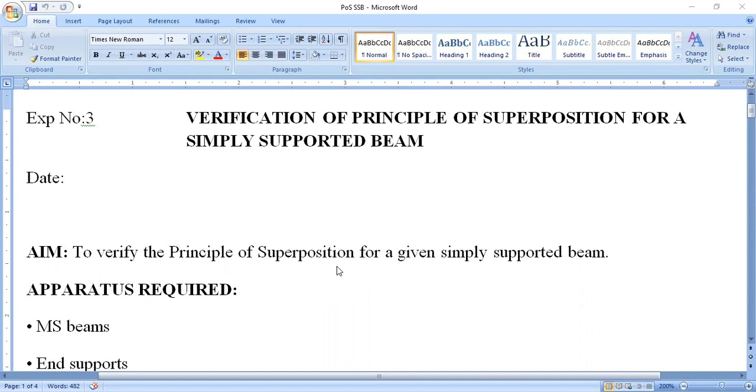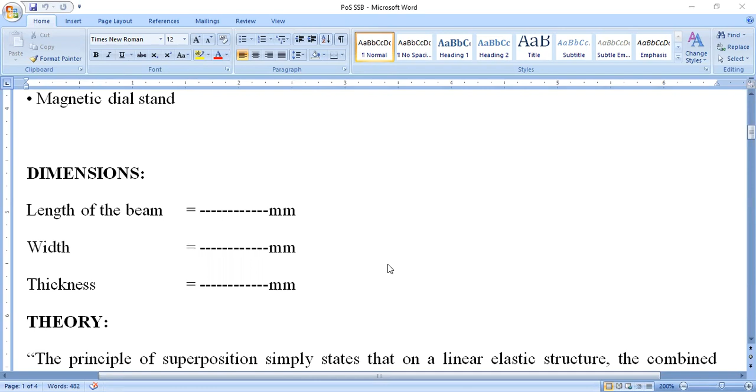The same apparatus is required. The dimensions I have given in the last class itself. And this is the theory, the principle of superposition theory.

The principle of superposition states that on a linear elastic structure, the combined effect of several loads acting simultaneously is equal to the algebraic sum of the effects of each load acting individually.

Delta 1 plus delta 2 is equal to delta 1 2, where delta 1 is the deflection at reference point O due to load on point 1. Delta 2 is the deflection at reference point O due to load on point 2. Delta 1 2 is the deflection at reference point O due to load on point 1 and 2, acting simultaneously.

Now I will explain with the help of a figure so that it will be easy for you to understand.

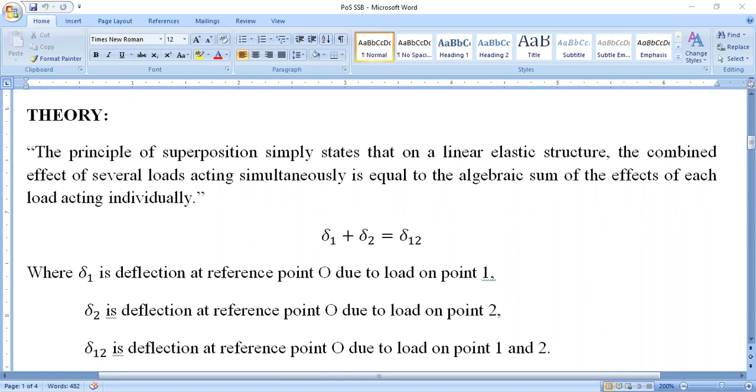Now this is the diagram. Simply supported beam, or the beam resting on a knife edge. Mark 2 points randomly, let us name them point 1 and point 2. Mark the reference point O anywhere along the beam.

Let us apply a load W1 at point 1 and W2 at point 2. Both W1 and W2 are acting simultaneously. Here weight hangers will be placed at both points. Add the weights simultaneously, and at the reference point, the dial gauge will be placed.

Once the weights are added simultaneously at point 1 and 2, measure the deflection at the reference point with the help of the dial gauge. Now this is the deflection delta 1 2.

Now, same beam, remove the load W2. Now apply the load W1 at point 1, measure the deflection at the reference point O. Let that deflection be delta 1.

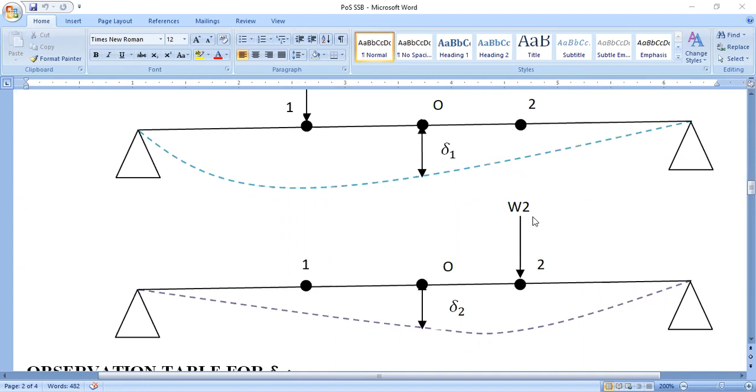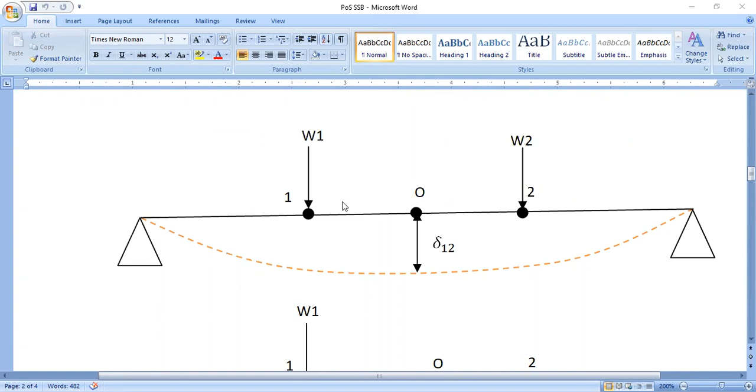This deflection delta 1 at reference point O due to load at point 1, plus deflection delta 2 at reference point O due to load at point 2, will be equal to the deflection delta 1 2 at reference point O due to loads acting at point 1 and 2 simultaneously.

As I explained in earlier classes on Maxwell's reciprocal theorem, how to take down the readings, how to fix the dial gauge, how to add weights in the weight hanger, and so on. For each increment of load, in the range of 500 grams or 0.5 kg, readings are noted down from the dial gauge and entered in the tabular column.

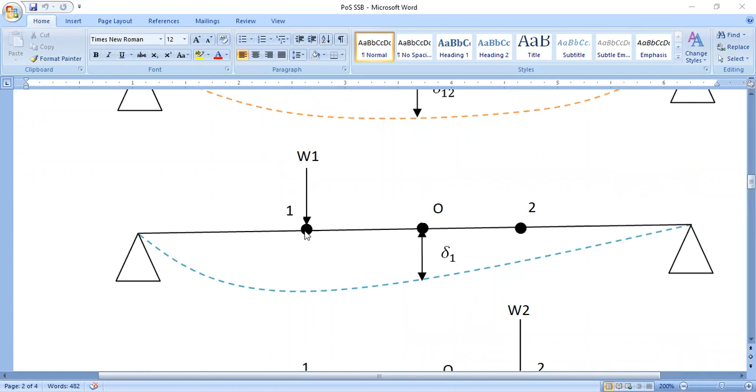This tabular column shows the readings for weight W1 added at point 1, like 0.5 kg. Measure the reading at the dial gauge at reference point O. Then add one more 0.5 kg, so for 1 kg, what is the dial gauge reading? For 1.5 kg, what is the reading? For 2 kg, what is the reading? For 2.5 kg, what is the reading?

Then unload it, remove 0.5 kg at a time, and note down the unloading reading also. Then calculate the average of the loading and unloading readings. Convert that dial gauge reading to millimeters by multiplying by 0.01.

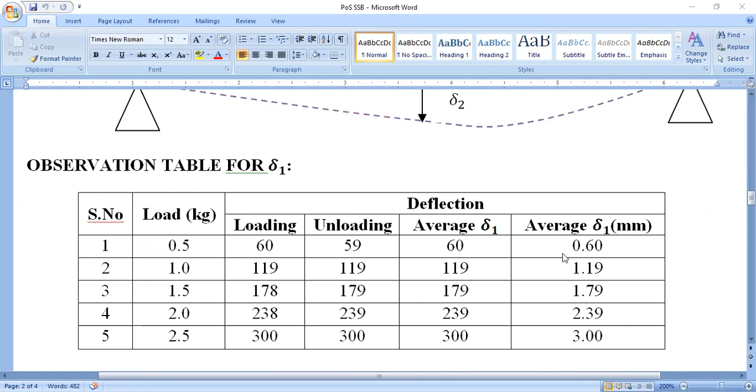So these are the deflection values at the reference point O due to weight at point 1.

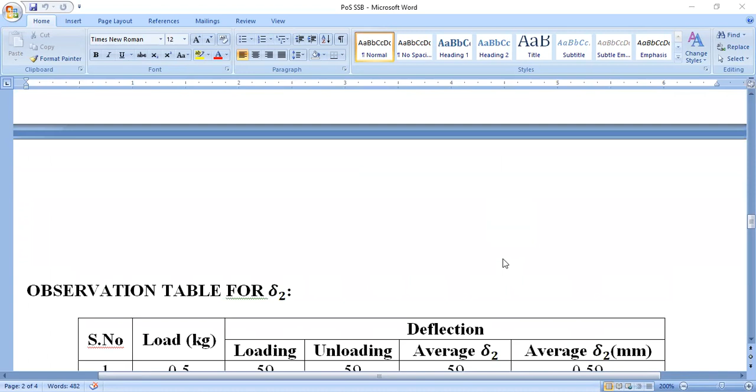Now add the weight at point 2 alone, in increments of 0.5 kg or 500 grams, and note down the deflection at the reference point O. Same way: loading, unloading, take the average of these two, enter here, then convert to millimeters by multiplying this average delta 2 by 0.01.

Then for P1 plus P2, add weights at point 1 and 2 simultaneously, like 0.5 kg at point 1 and 0.5 kg at point 2, that is W1 plus W2 or P1 plus P2. So 0.5 plus 0.5 is 1 kg, then again add 0.5, so 1 kg plus 1 kg is 2 kg, and so on. Measure the loading readings, then unloading readings, take the average, then convert to millimeters.

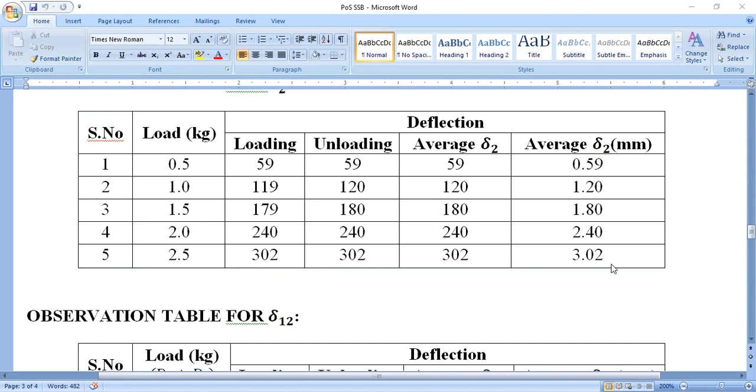Now look at this, take any readings and compare your results. What the principle of superposition says: delta 1 plus delta 2 is equal to delta 1 2. Delta 1 is 0.6, delta 2 is 0.59. If you add these, you will get 1.19 millimeters. So this is the procedure for a simply supported beam.

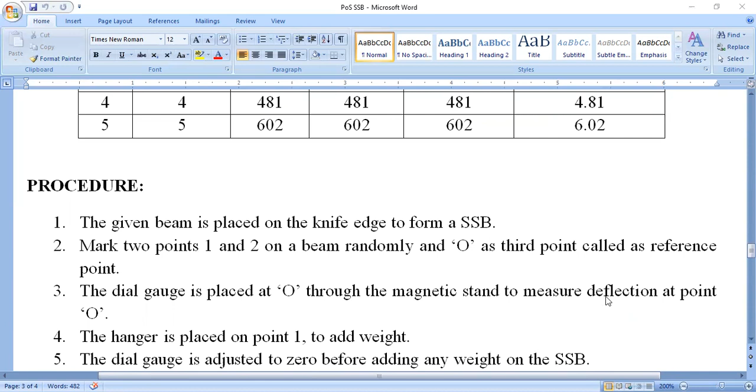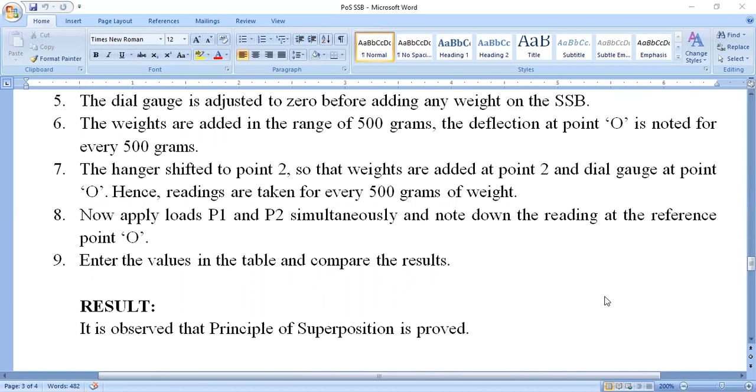Whichever I have explained so far, the same explanation is given point by point. Hence, it is observed that the principle of superposition is proved.